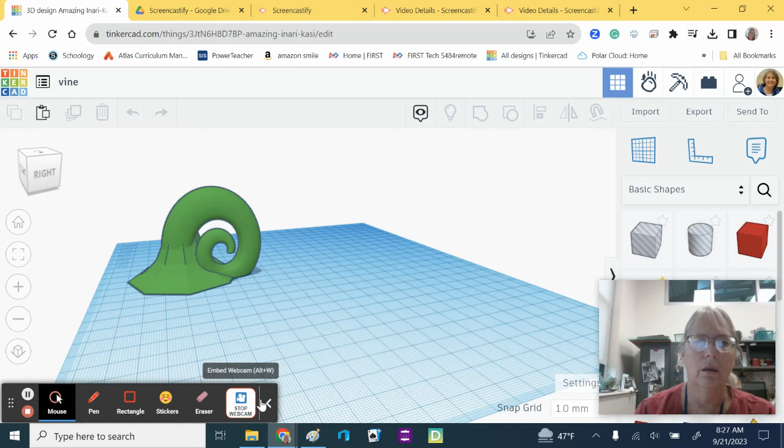So the last time we were together, we finished our vine. Now we want to make sure that when it goes to 3D print, it can have a flat surface to print and can also fit beautifully when you glue it right on top of your pumpkin top. So we're going to copy this shape, click on it, hit copy, and exit out of this file. And we're going to go find our pumpkin that we were working on.

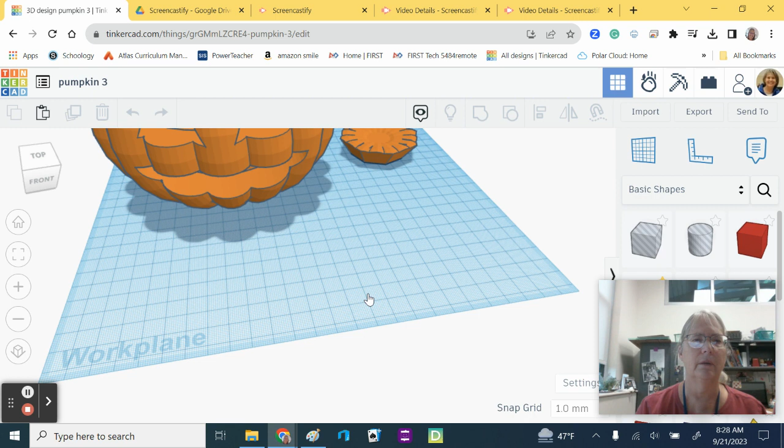Tinkercad file. Now here we are with our happy little pumpkin that we made. The important part that I want is the top. So I'm going to first of all paste my vine into this document.

And then I'm going to make a copy of my pumpkin top. Now you'll notice my vine is way larger than it should be. At this point, it's very easy to just resize the vine to something that looks appropriate on top of your pumpkin top.

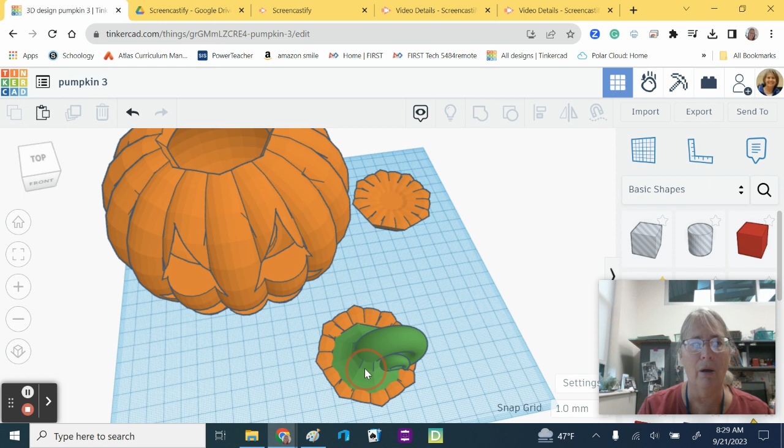And what you want to do in this, again, you're going to have to eyeball this to align it. You want to kind of line it up where you want it. Make sure your snap grid is off for this so that you can easily move in micro increments. Okay, that's looking pretty good for me.

Might like mine a little squattier, fatter. Okay, my size is right and my height is right.

Now I'm going to turn the pumpkin top into a hole, like that.

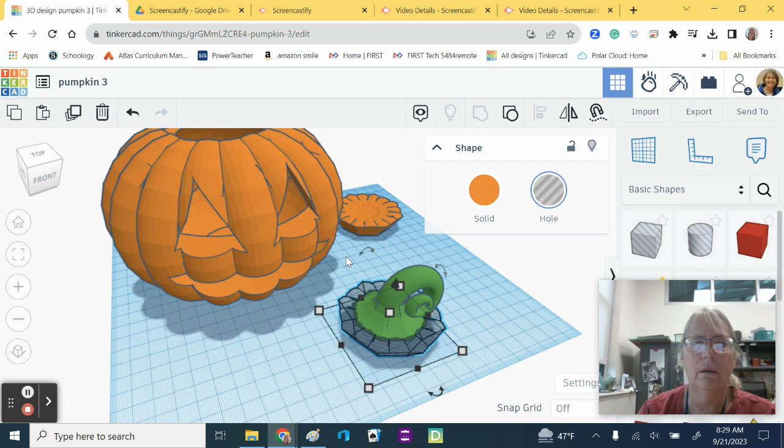And I'm going to select both shapes and group them. Takes a minute because this is a very complex shape.

Now, if we look really closely at this, we will see that there's sort of a scalloping around the sides and a flat place on the bottom.

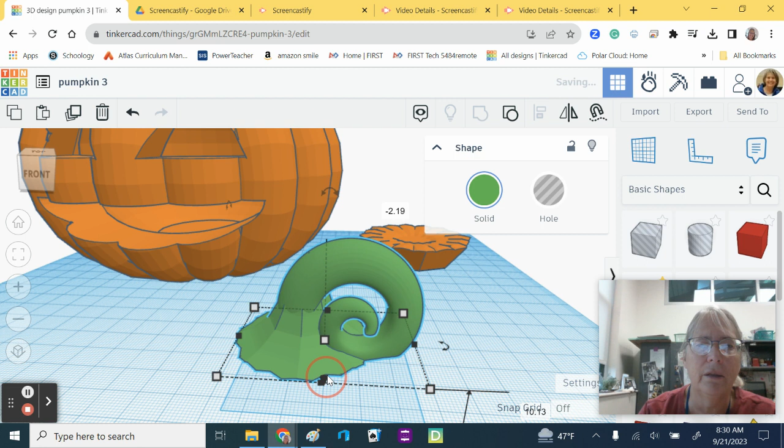Make sure that you bring this back down to 0 on your build plate by clicking. It won't let me click in that corner. Hold on. Clicking on this number and changing it to 0.

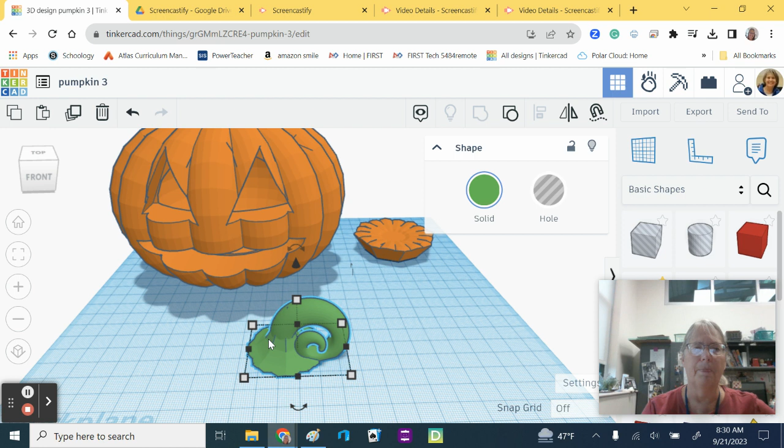Now the 3 parts of your pumpkin are ready to print. Remember when you print the vine and the pumpkin itself to make sure it has supports everywhere, or the eyes won't print beautifully.

And that should get you a beautiful pumpkin that you can enjoy for Halloween.